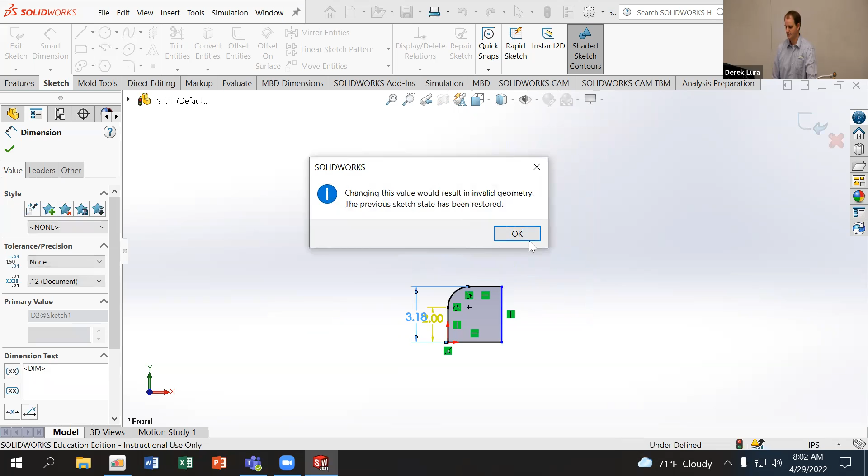I have this 2 on here, which is not allowing me to define that height appropriately, so I'm going to take that off for a second. This has a height of 12 and a width.

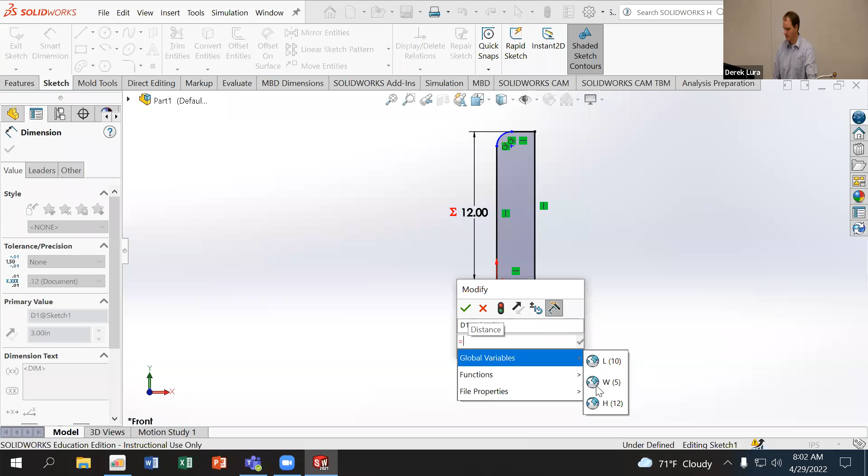Then I'm actually going to delete this arc off the top. Oops, sorry, wrong button, I just want to merge those 2 together. So I'm just going to control click the 2 points and then click on merge. There we go.

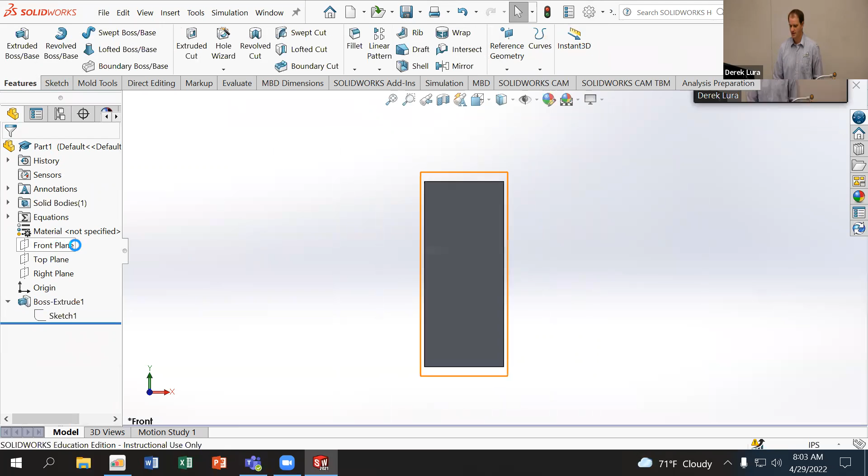And I'll go ahead and extrude this to the length. This is typically what you want to start off with for your first extrude, a simple mid-plane extrude.

If you want to have a revolve geometry, then in our sketch, what we really should have had is a center line and then the geometry that we wanted to revolve about.

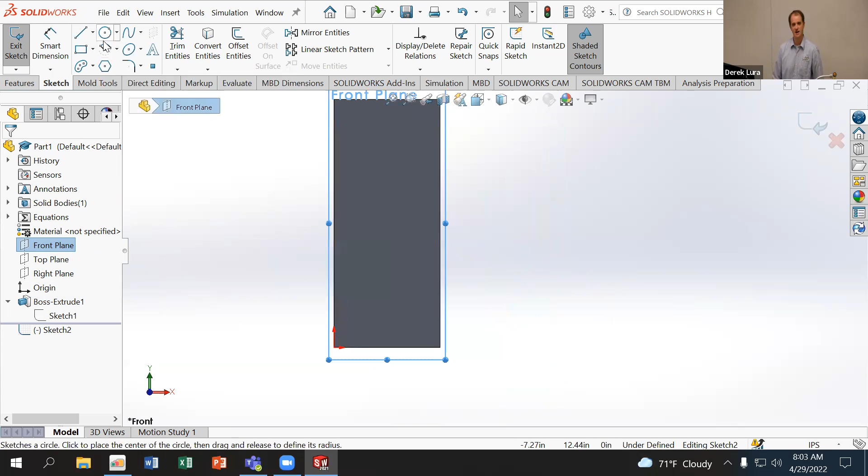So just to give you guys an example of what that looks like, if I wanted to add a kind of torus shape embossed onto this part, I could just draw the circle relative to the center line here, and then I can come into my revolve features, and I can revolve that around.

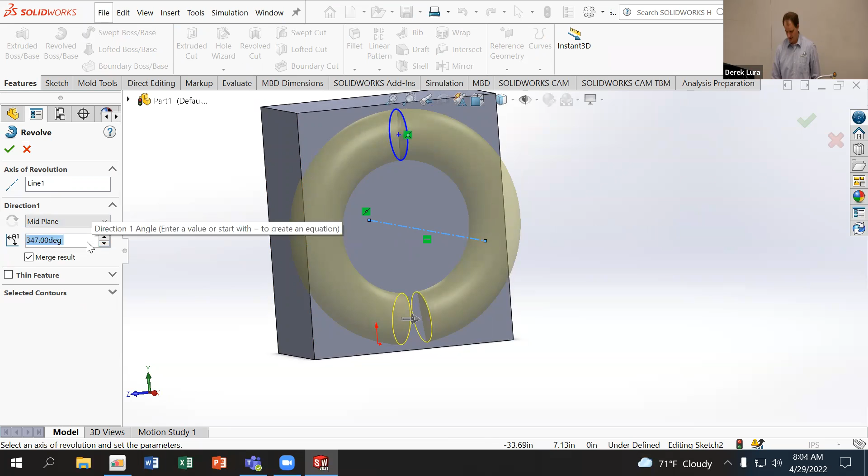Obviously that's going to be a bit too big for the part if you want to come off the edges there, but just to give you an idea of how that works. Keep in mind, you do have the same set of options as far as up to next, surface, offset from surface, and midplane. So if you only want this to go for a certain section length, say 90 degrees, you can do that very easily in the revolve options.

I'm going to discard that sketch and go back to my original one. Again, I said before that if you wanted to add fillets to a part, it's very easy to do that inside the feature.

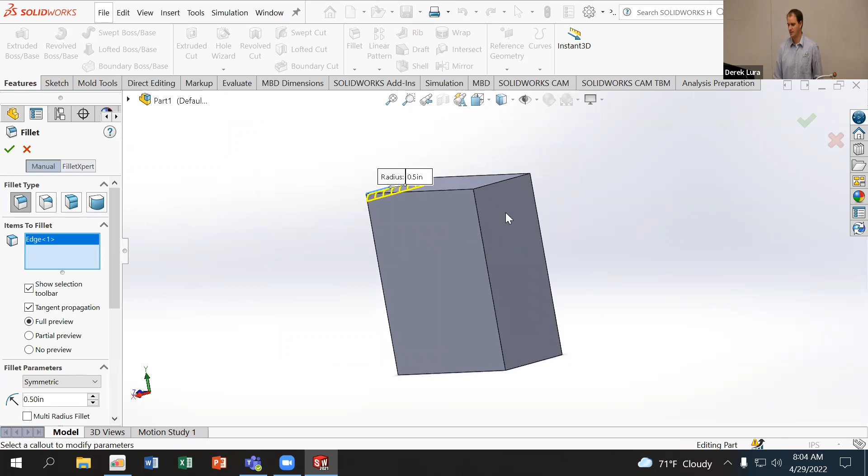One of the nice things about this is if you have multiple edges that need to be rounded the same way, which in a lot of parts you do, it'll have something where it says you have a typical fillet radius, or you have fillets on a lot of the different surfaces or on a specific face.

You can apply those fillets using the edge or the face. When you use the face, it's going to use all of the edges that are attached to that face. So I can very quickly fillet the entire part by selecting the faces rather than selecting all of the edges, and that's going to save me time.

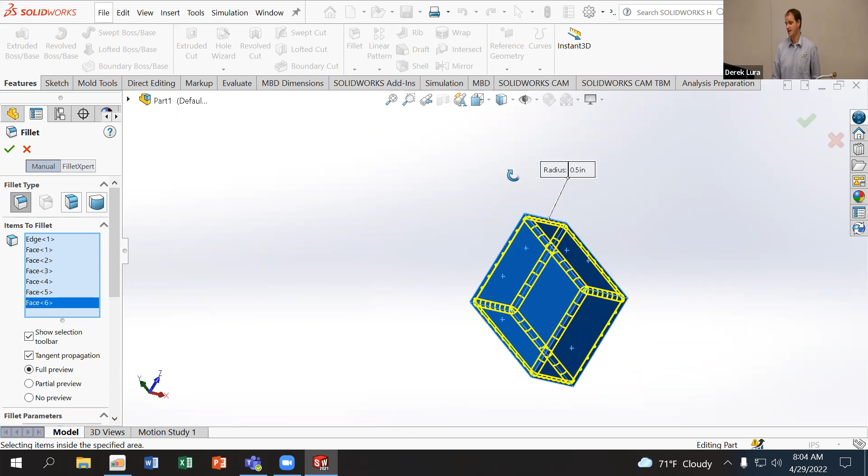Actually, I don't even need to get all of the faces, if I just get all the faces on the perimeter of the object in one direction, and that goes very quickly.

You'll also note that it ignores duplicate selections. So if I have extra things selected, it doesn't give me an error, it just says okay, well that edge is already there, I don't need to do it again. I'm just going to do that once for each of the edges that are selected.

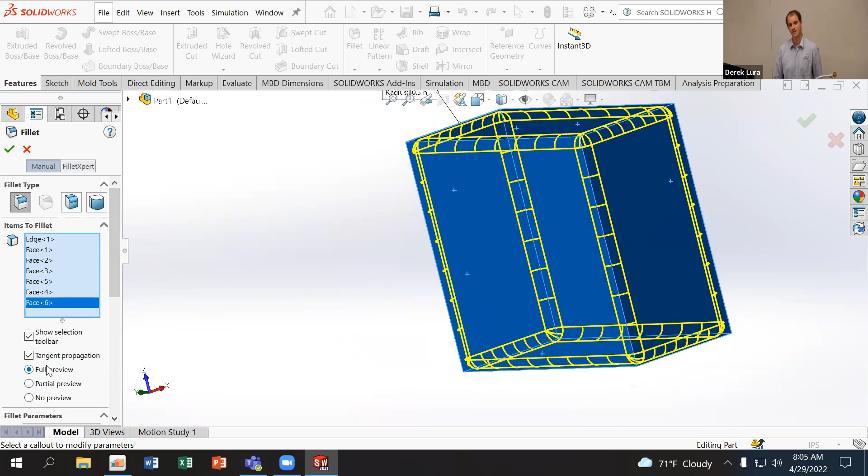Tangent propagation, usually you want to have on, although not always. I almost always want to have the full preview on. It goes a little bit slower, but not slow enough to make a difference. And chances are, if it doesn't show up in the preview, it's not going to work inside your part to begin with.

And if that happens, then you think about other ways of adding the round to that feature. Can you do that inside the sketch as opposed to inside the feature geometry? Or is there some reason that that's not allowing you to add that where you want it? And you got to go back and kind of debug that a little bit.

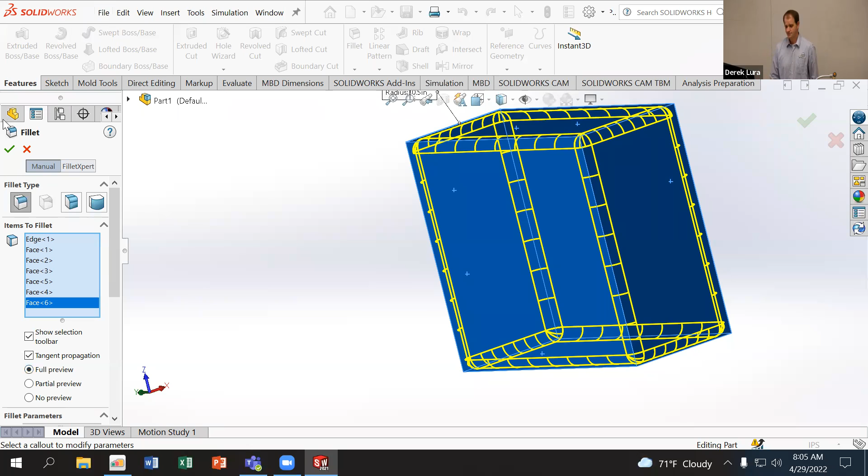So in this part, let's say I want to have rounds on just my corners.

I'm going to unselect these faces by clicking on the face from the model or the feature listing, then hitting the delete key on the keyboard. I can also toggle them by selecting them again. Knowing some different ways of making those selections is very helpful.

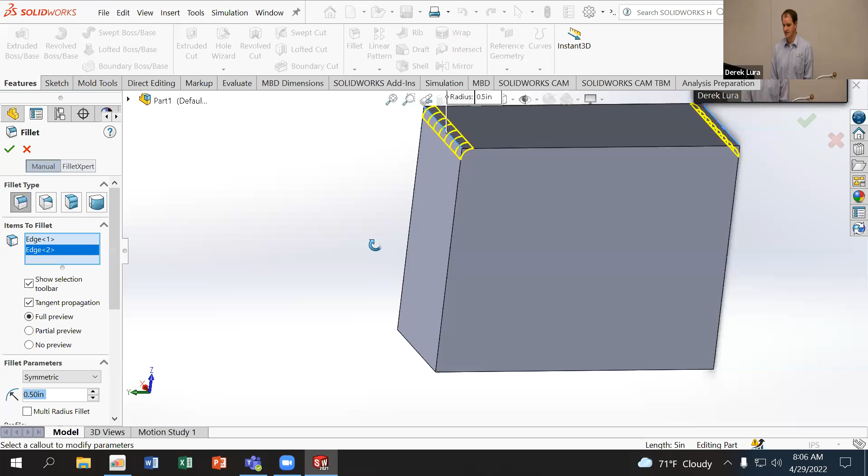For each of your features, you're going to have this feature selection box. The blue one is the one that's active. If you don't know what that's for, hover over that box and it'll give you a little tooltip that tells you what it's expecting inside. So if you're asked to use a feature you're not familiar with, try that first.

If that doesn't work, come into your search bar, search the help for the feature, and it'll give you more detail on how to use it. Again, using that help tool and the search option to search for different commands is totally legit. If you don't know where to find something, search for it.

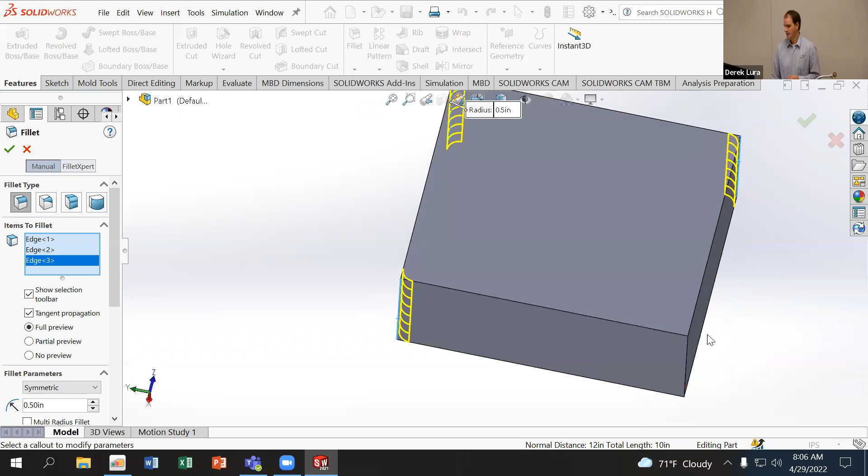Very easy to use. So I'm going to round each of these corners—let's go ahead and use half an inch. And that gives us some basic geometry.

Now, if we want to add more features to this part, there's lots of different options we can do. Typically, the geometry you're adding to a part is a function of the geometry that's there in the beginning. I want to show you guys a few tools to very quickly add different features to a part.

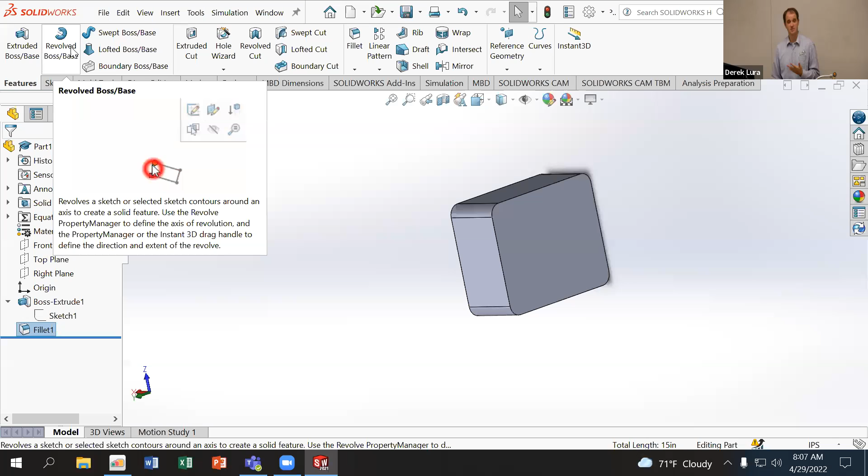The first thing is just doing extrude cuts and revolve cuts. Those are your most basic options. They work exactly like the boss extrude and the revolve boss base, because they're the same tool—they just subtract instead of add.

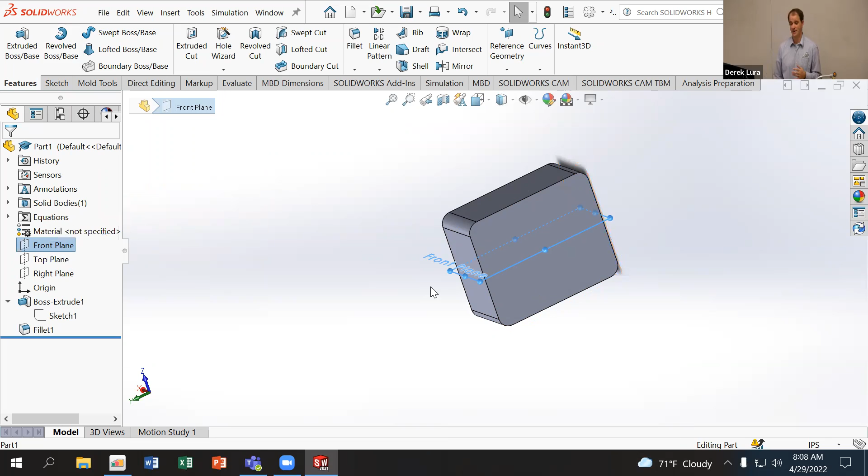Most of the time when I'm sketching on a part to remove something, I'm going to sketch on one of the faces of the part rather than the original planes. Now, if what you're sketching is going to go all the way through the part, use the base planes, since that can be less dependent on changes later. But most of the time when adding additional features, it's because you want them to have some relation to the existing part geometry.

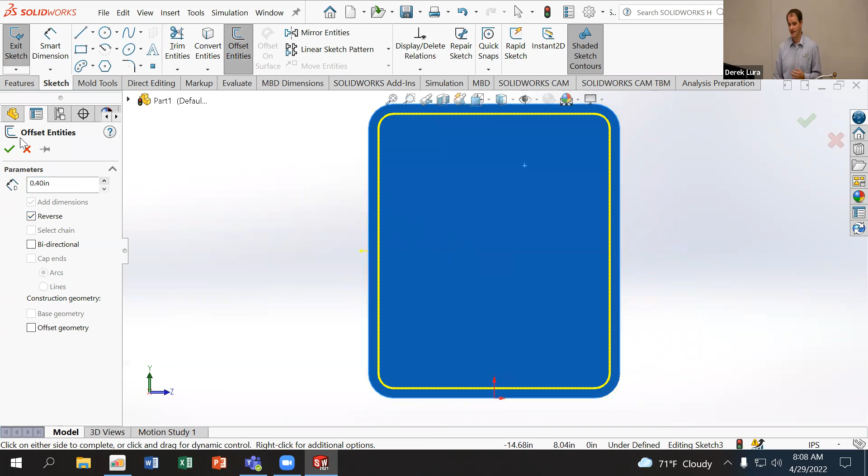One of my favorite tools when I sketch is to use the convert entities and offset entities tools. So if I want to make this into kind of an open box, I'm going to use offset entities to start, specifying the wall that I want there.

If I need to add additional features onto that—say I don't want this to cover the entire box, just a portion of it—then I'd go and wall off a section and then trim out the excess. This gives me a nice way of making that section inside the part.

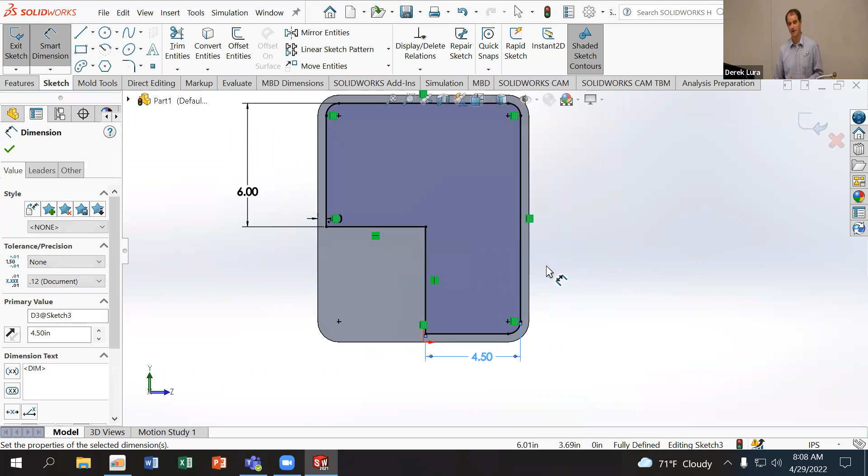Now, more advanced users might say, maybe you could use a shell tool to get that. Yeah, you can. But use the tools you're most comfortable with as you work through the parts, so you get the geometry you want without worrying about accidentally messing things up.

So with that convert entities or offset entities, I can get very quick geometry, or very complex geometry very quickly, just by using that face selection. It's going to use the whole perimeter of whatever I selected.

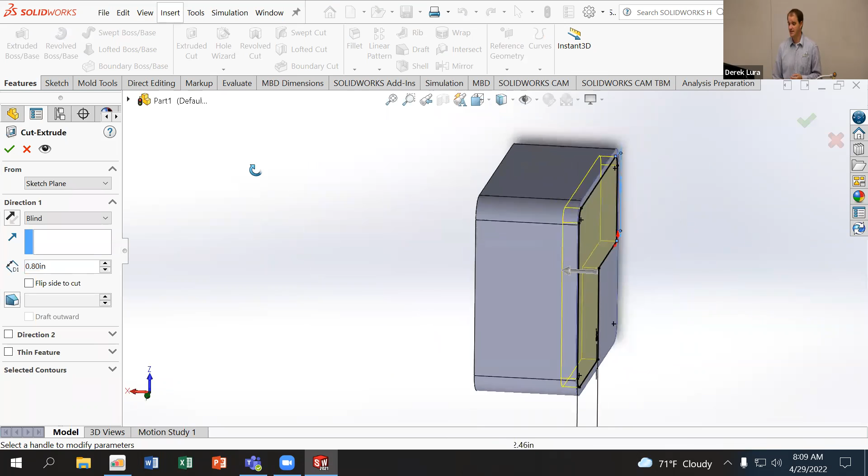Then I can extrude that out. A lot of times when you're given the thickness, you're not given the depth of the extrude right from where you're at—you're given the depth up to a certain point. Keep in mind, you have all these options for how you want to extrude that part.

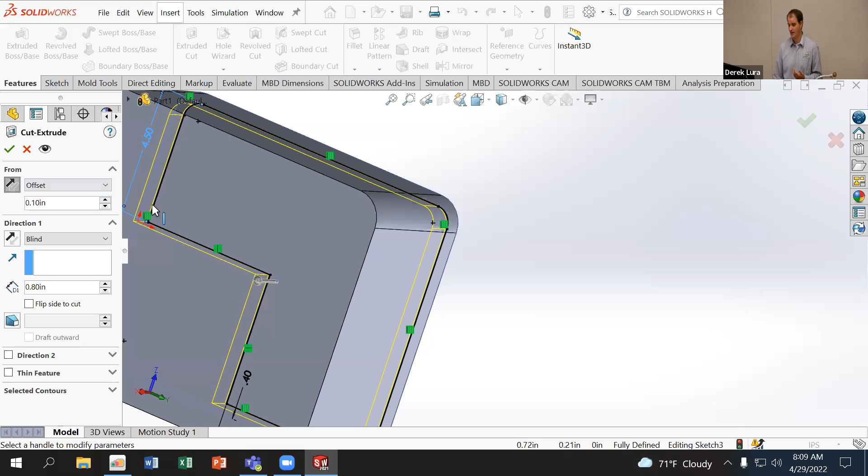So an offset maybe makes sense for a starting point if you don't want that cut to start on the plane you were actually sketching on. Maybe you want it inside the part a certain amount. You can just insert that in and make a hollow region inside a part very easily using that offset, without having to create a reference geometry.

The next thing you might want to do is have it go to an offset from a surface, or use these other options to get a specific depth of cut without being given additional geometry or having to do any kind of math.

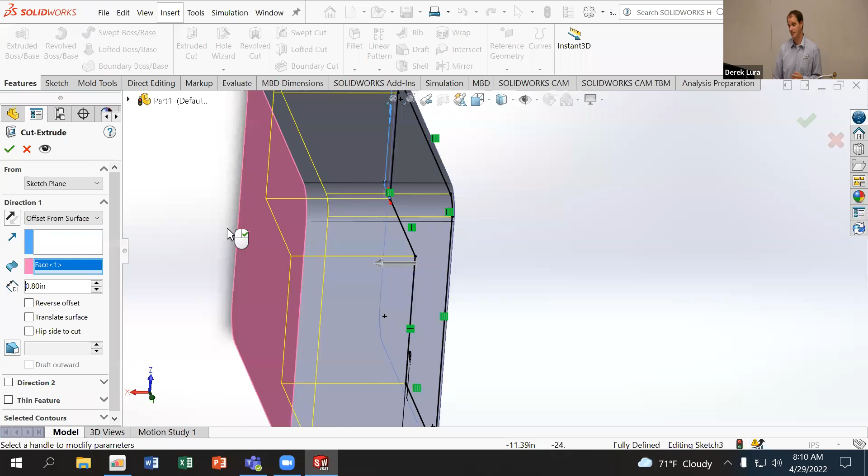I find offset from surface being one of the most commonly used features inside CSWA, where they want you to have the cut go up to a certain distance from the back of a part. In this case, this cut is going to 0.8 inches from the back wall, which is very common. And again, you can kind of see what that looks like.

The other thing I really suggest you guys use is the section view. This is a great way of inspecting your part to make sure you have it set up the way that you want it to. And when you're given a section view inside a drawing with cross hatching, you can use this to verify that you're getting the geometry you were expecting.

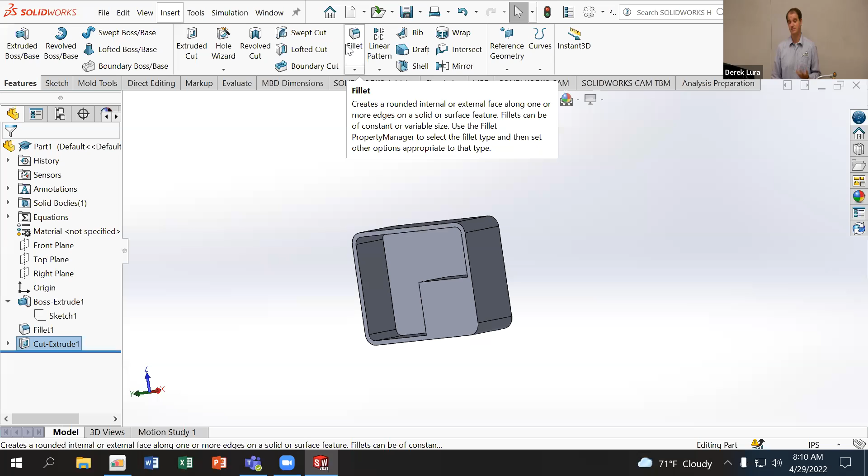So if you click on that section view, the defaults are going to be your front, top, and right planes. You can see how that cuts the part in half, and this lighter surface shows me where that cut is going out. I can use these options to pull this out or rotate it to face however I want, and I can also toggle between the different planes, or manually type in different offsets to get different cuts.

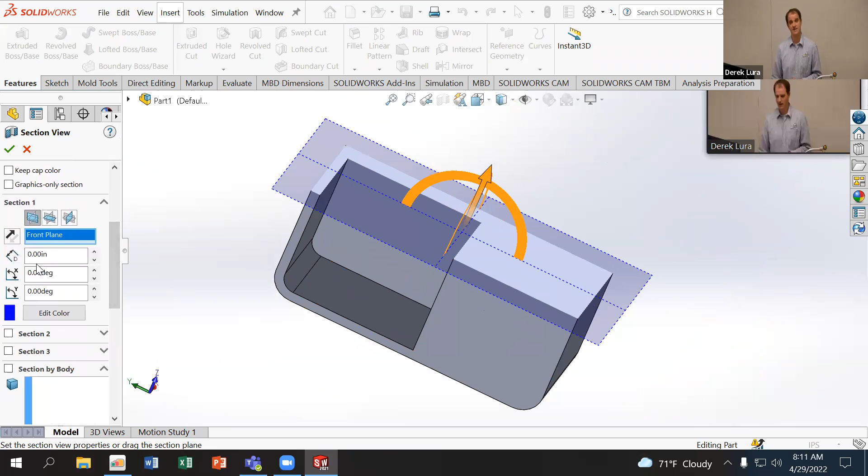After you hit the accept button, it's going to keep that section the way it is. Then you can toggle it on and off again just by clicking the button once more. So very helpful in seeing some of that interior geometry.

The other thing you probably see a lot of is use of the hole wizard. A little bit less common in CSWA, but you may have some hole callouts because they do want to check to see if you know that tool. Really, you've got to watch for and make sure you're paying attention to the type of hole.

So is it a counter bore? Is it a countersink? Is it just a blind hole? Those blind holes are probably the most common because you can use them with just circles, so it's less likely to trip somebody up. But you have those options.

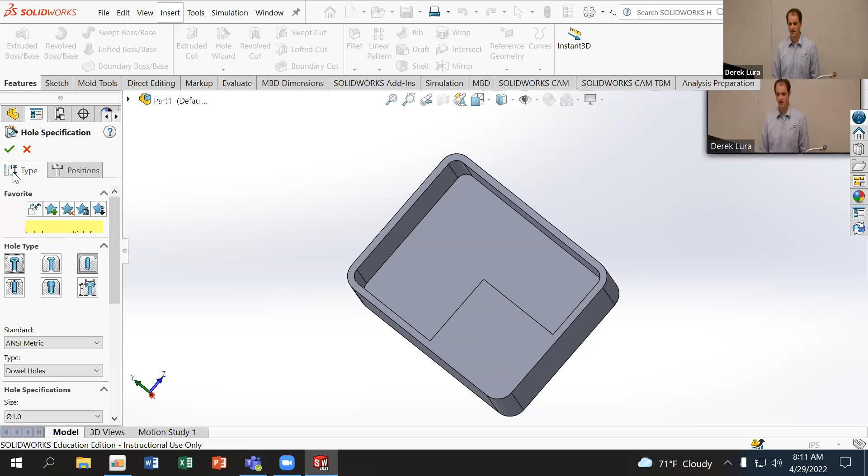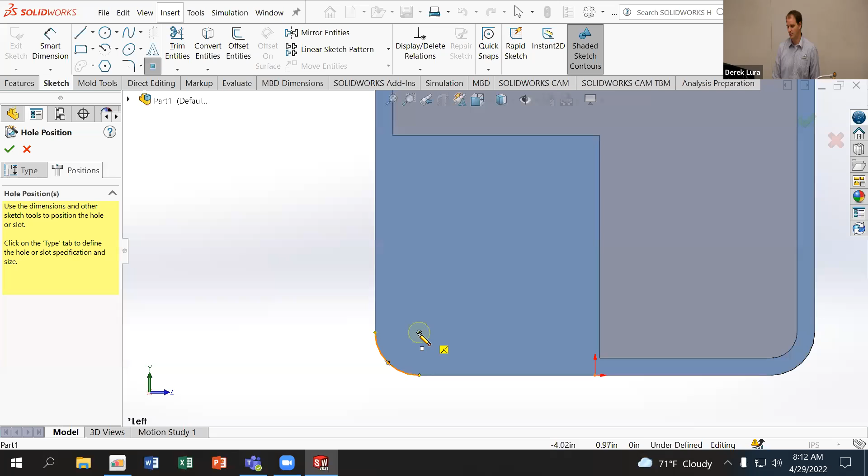Just make sure that you're positioning the hole before you start trying to type in all the values. I find that positioning the hole first is a lot easier than trying to get everything typed in and then figuring out where it's going to be, especially if you're not sure exactly what size to use from a design standpoint. Positioning the hole, picking the surface, and then selecting where you want to put the hole can help you decide what size of hole to use on a more generic design standpoint.

So if I have this selected first, I can go through and say, okay, I know I'm in inches, so I want to use an ANSI inch size, and maybe a standard drill or a standard screw type. I can specify that screw type inside my options here, and then I can just specify how deep I want that hole to be later on.

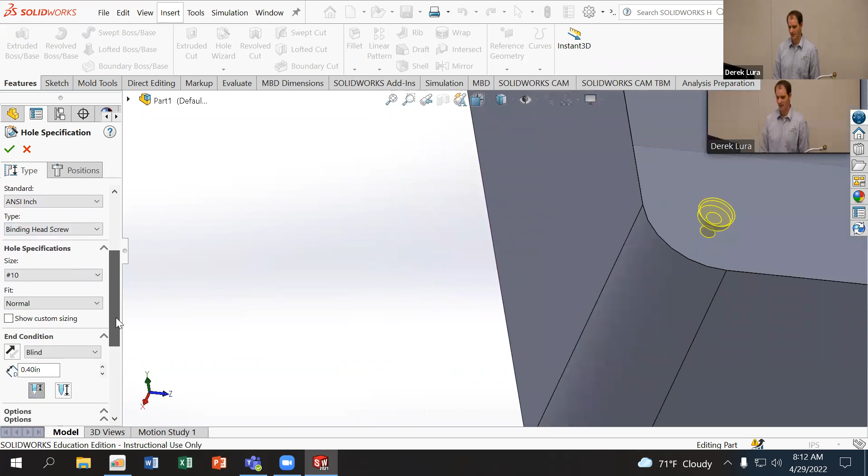And if you don't know how deep you want it to be, most of the time you're going to use a through hole. Now, this would be a really, really small screw in a big part, probably not something you want to use. And again, you can see that just by looking at it. So that's something that's very helpful.

So maybe I want to go to 3/8 inch and use a slightly larger piece there. Don't be afraid to start off with very simple shapes and not try to do everything all at once.

The biggest mistake I see when people are making parts is they try to do all of the geometry at the same time rather than breaking it up into smaller chunks. It's very easy to add complexity to a simple model, but it's hard to fix a complex model when something breaks.

So if I draw everything out on the first sketch and get all that geometry in there, I've spent a bunch of time, and then if something goes wrong, I have to spend a bunch of time to fix it because all of my features are very complex.

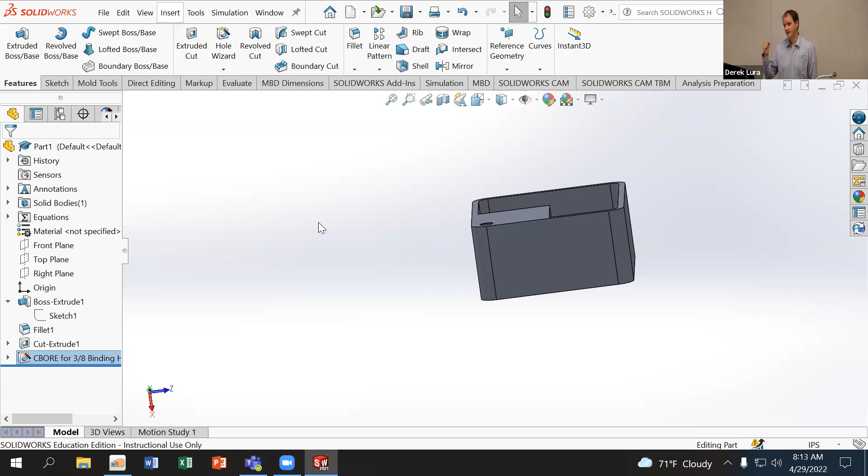If your features are simple, they're typically very easy to fix. The other tool I really recommend you use is the cut extrude using a single line. To do this, all you need to do is make sure that line crosses the face of the part.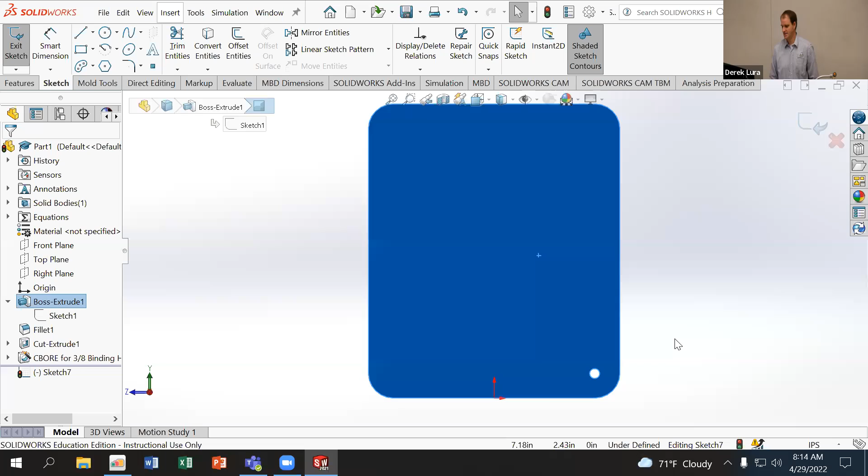Say I want to make a recess here to get to that screw more easily. I can come in and sketch on this face. As long as my sketch crosses the face from one end to the other, it will allow me to do that cut extrude with just that one line. I don't have to spend time converting the edges of the rest of the part.

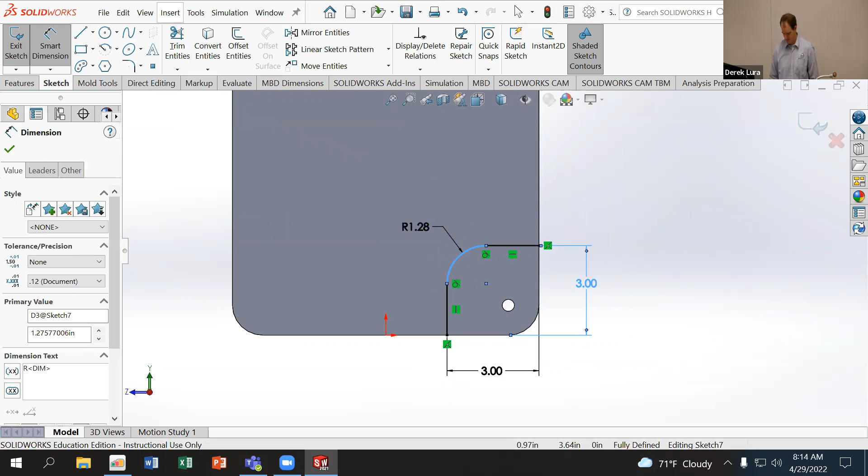Again, I want this to be fully defined, so I'm just going to define the sizes here. Let's say make it 3 by 3, and we'll make that radius 1 inch. So just 3 entities crossing that sketch. I'm just using my middle mouse button to rotate that a little bit.

When I go and extrude cut this, all I have to do is tell it which side I want to cut, the inside or the outside, and it's going to go ahead and cut it the way that I had defined on there.

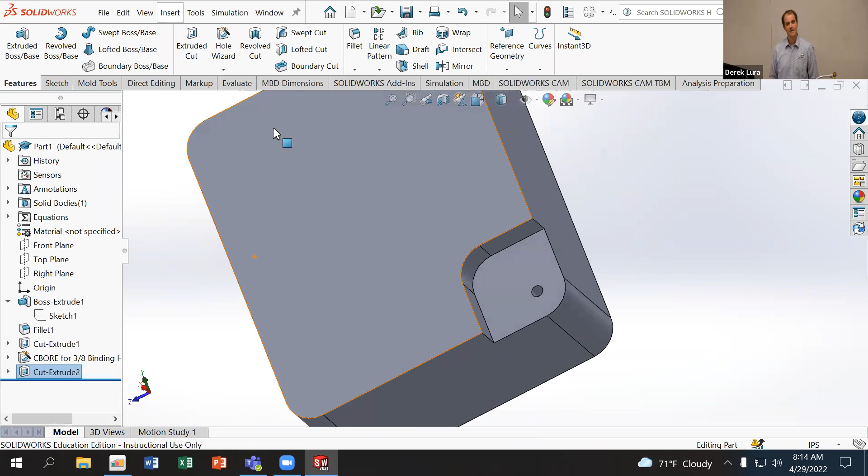The other thing that's important, say you want to define these distances relative to my exterior features here, not a problem. All I need to do is go into my sketch and change my view type so I can see those interior faces, and I typically use the hidden line view to do that.

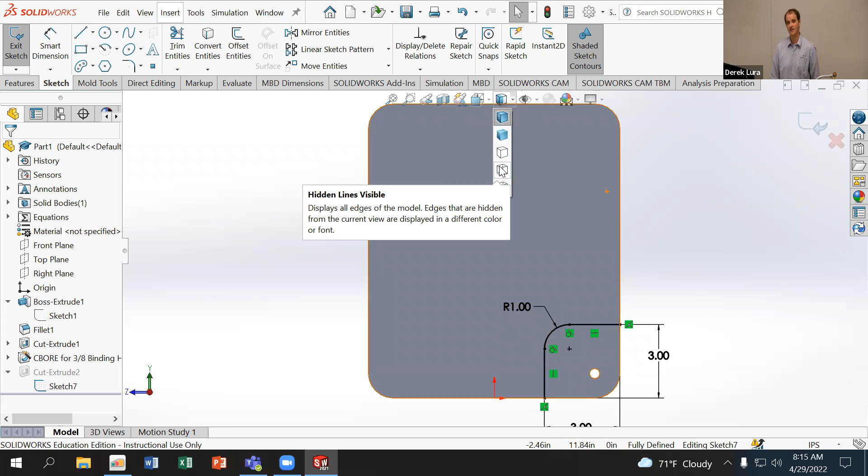Although you can also just rotate your part to the other side and sketch from the other view where you can see those features, even though your sketch isn't on that side of the part. I think the hidden line view is nice because it allows me to stay on the same side, but if you don't like that view because it gets confusing, or maybe it's complicated because you have a lot of features stacked on top of each other, use those different view options to make it easier for you to see what you're doing inside the part.

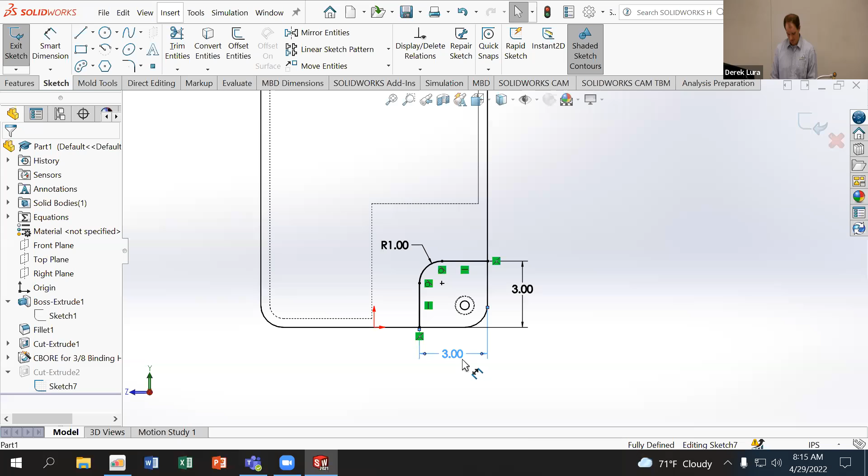Then you can see, we can go through and define the offsets relative to these interior features, as opposed to using those exterior edges, if that's what I'm given inside the problem statement.

You always want to try and use as much as you can the dimensions that you're given in the actual part itself when you're making parts inside of the CSWA exam. Because if you have to do math or conversions or different features, it's going to take you longer generally, and it's also going to make you more prone to error. Even if you made the part right using all the correct features, if you did that mental math wrong, you still are not going to have the right geometry.

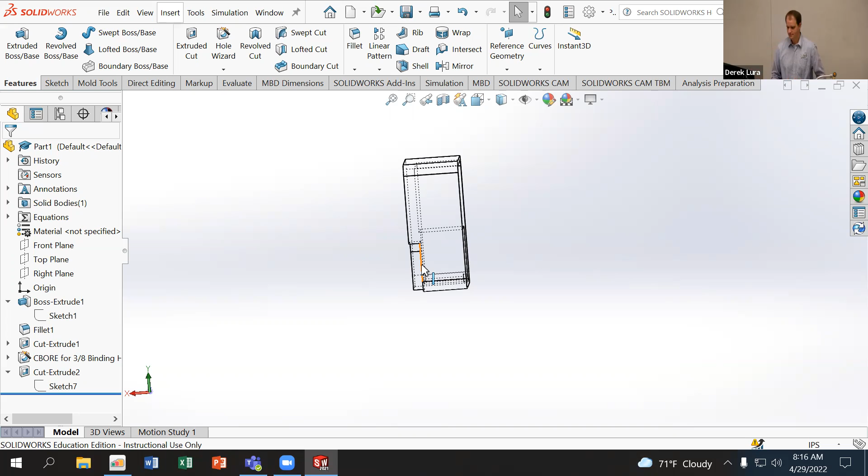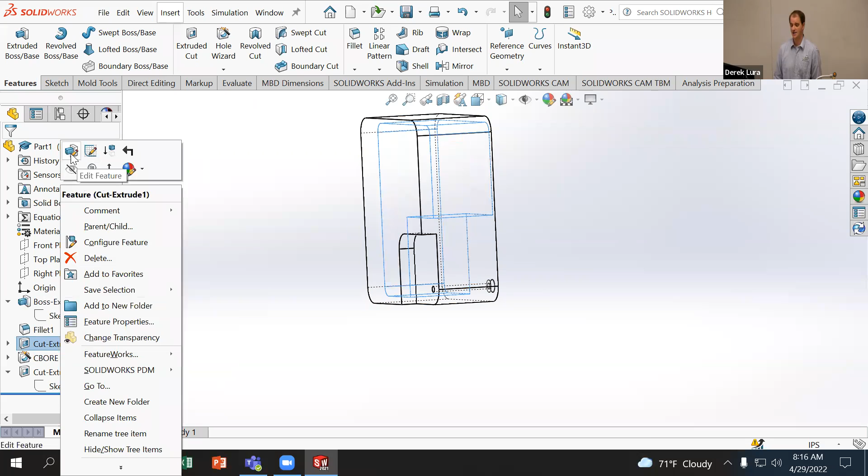Another thing I want to mention is the use of drafts. Now, drafts won't work with these single line cuts, but whenever you're using a simple boss extrude, or a boss cut, or even a revolve — actually, I'm not sure you can do it with revolve — whenever you're doing boss extrudes and boss cuts, you can add drafts to the actual extrude itself, which on the CSWA, most of the time, if you're adding a draft, that's the only type of draft you're going to be adding. It's one of those where you're basing it off of the original sketch itself.

In this case, I'm going to change my view type so we can see the solid lines a little bit better here. When I add this draft to the part, we can see that there's now an angle coming in from all these surfaces. That's a very easy tool to add if you're doing it in that context.

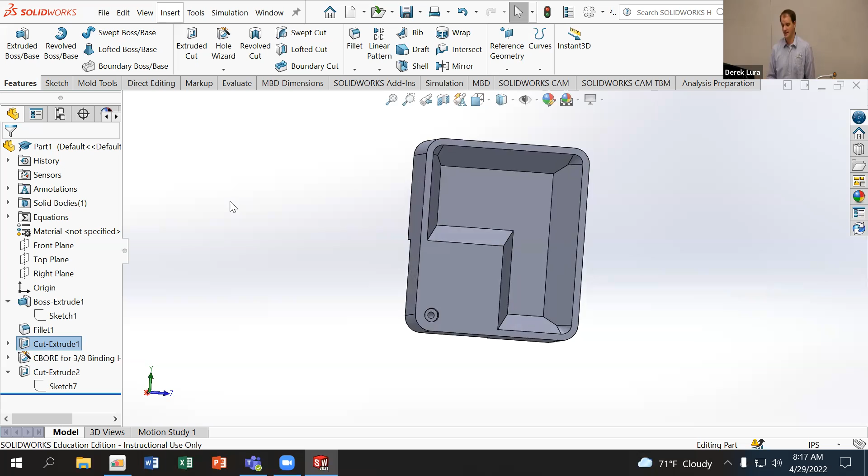Keep in mind that on this one, since I used one of those edges, it is using that kind of larger edge when I did it. So adding drafts after the fact can create issues further down the line, whereas most of the time, if you add them very early on, it's going to work out better for you.

If you all enjoyed that part, we're going to do one more part on assemblies, and then we're going to transition to doing some work for CSWA practice.